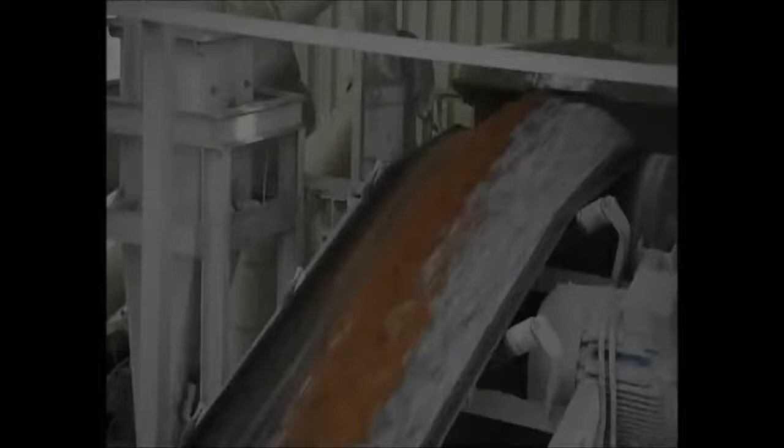Concrete. It's the most used building material on Earth. It was the building block of the Roman Empire. Today, it's the material for a new generation of gravity-defying skyscrapers. The raw ingredients that create this magic formula can be found in nearly every country on Earth.

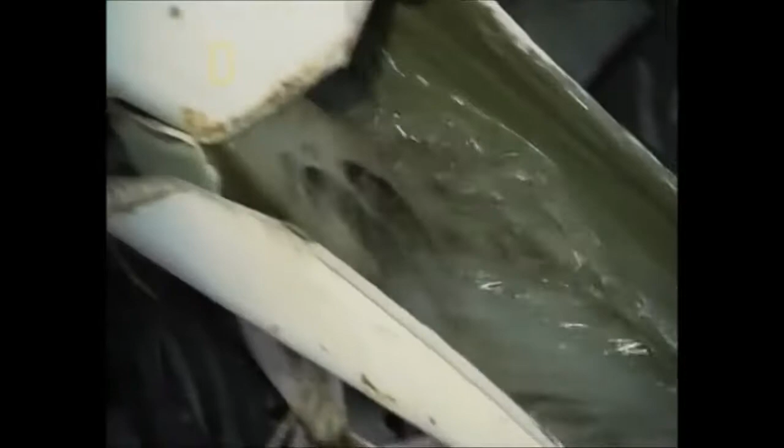Yet how these simple components are mixed together can make the difference between tragedy and triumph. From the mundane to the massive. From the ordinary to the extraordinary. Concrete helped pave the way for innovation and laid the foundation for the world's greatest civilizations. Now, go inside the science of concrete.

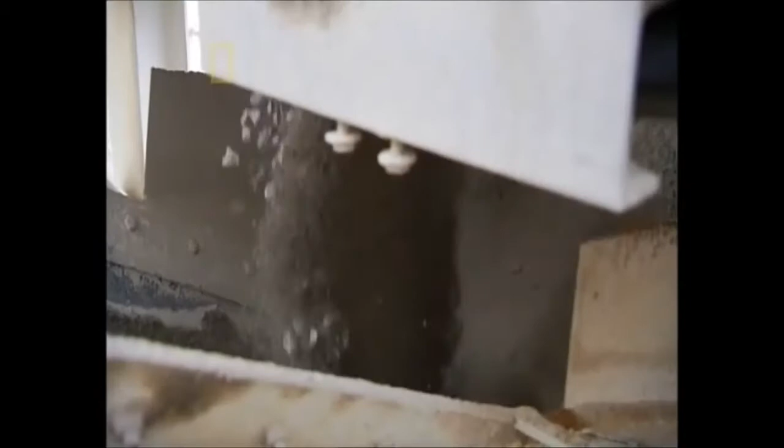It starts out like liquid. When it dries, it becomes stone hard. This amazing metamorphosis has earned concrete the nickname liquid rock. It has served as a cornerstone of engineering for centuries. And it's a highly prized tool of construction for a reason.

It's easy to take concrete for granted. People see it in sidewalks and roads all the time, every day. But in fact, it is the closest thing to a miraculous material in construction that we've ever had. Concrete is everywhere. It has an almost unlimited engineering potential. It can take on nearly any shape and forms the backbone of a variety of the world's construction.

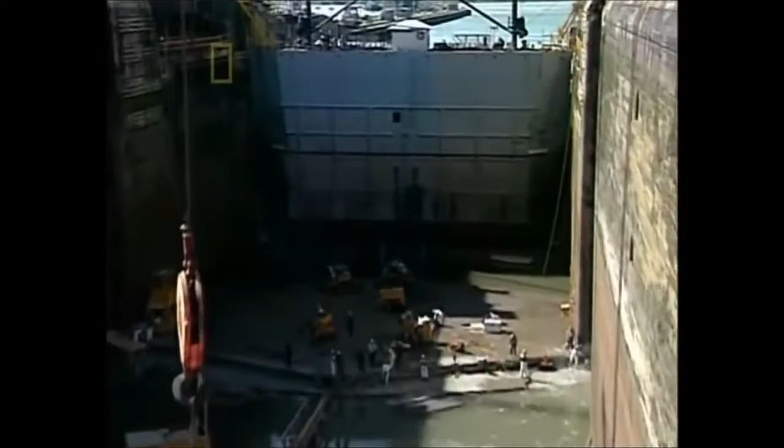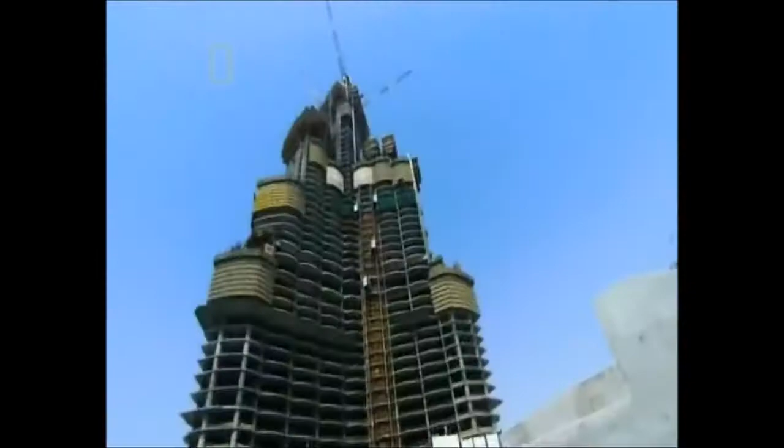Superhighways, massive bridges, man-made waterways, mega dams, the world's tallest skyscrapers. This miracle material begs the question, how does it do it all? I worked on a lot of jobs, and basically they all have a different formula for their concrete. Now, I can't imagine the world without concrete.

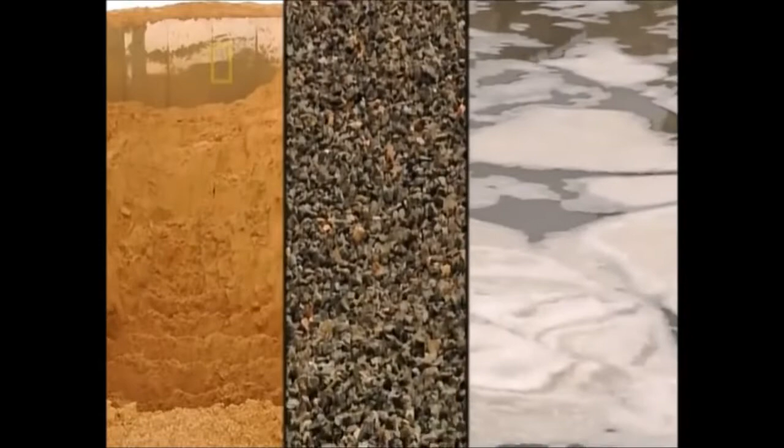The basic formula for concrete is simple. Sand, crushed rock, called aggregate, water, and the heart of the concrete mix, cement. Cement, it is the grey, powdery material that acts as a glue that sticks all of the concrete together. It covers and coats all of the gravel, the sand, and the rock as a way of gluing and binding the whole material together.

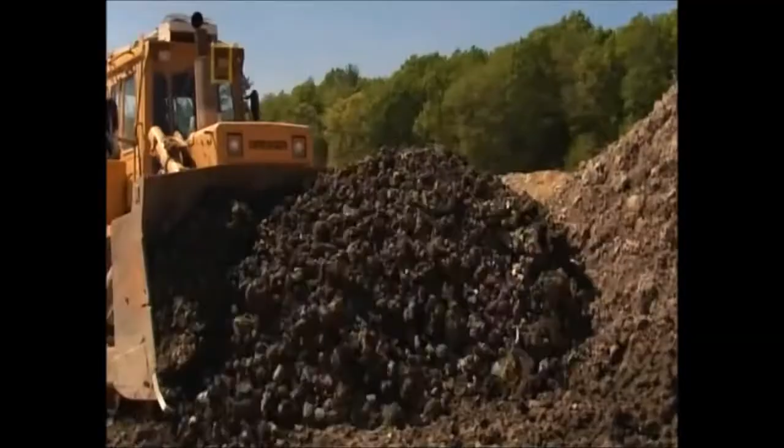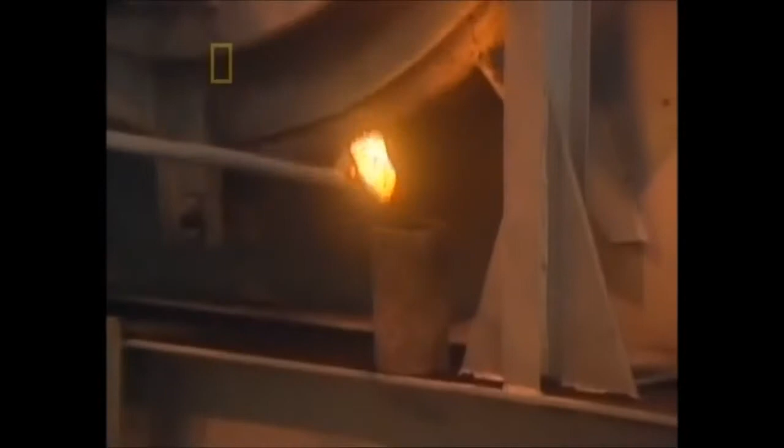To make cement, you need limestone, clay, and other elements like iron. These ingredients are crushed and combined into a powder that's poured into a kiln. The massive cylindrical spinning kilns heat the mixture to a temperature as high as 2,700 degrees Fahrenheit. The mixture becomes partially molten, forming a new marble-sized component called clinker. Once cooled, machines grind clinker into a superfine powder we know as cement.

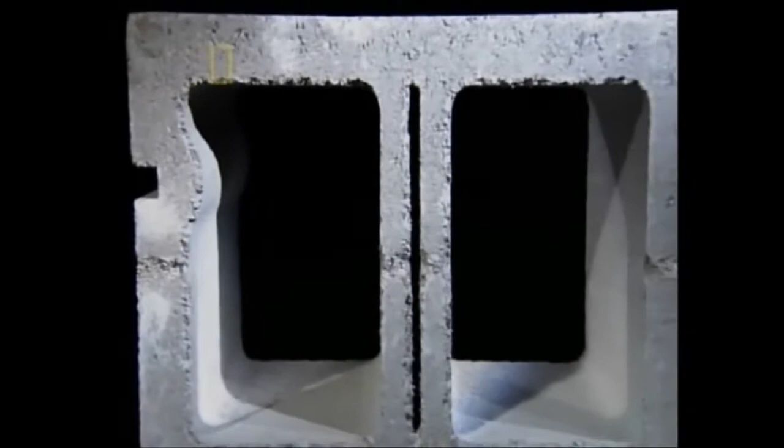Cement binds the ingredients together. When added to sand, water, and crushed rock, the cement reacts, linking the raw elements into one powerful whole. Water is the key. When cement reacts to the water, it undergoes a transformation called hydration.

During this reaction, a node forms on the surface of each cement particle. The node grows and expands, linking up with other nodes. It sticks to the crushed rock and sand in the mix. Cement binds these ingredients. As it solidifies, concrete becomes a building block of modern construction. This basic process hasn't changed in over a century.

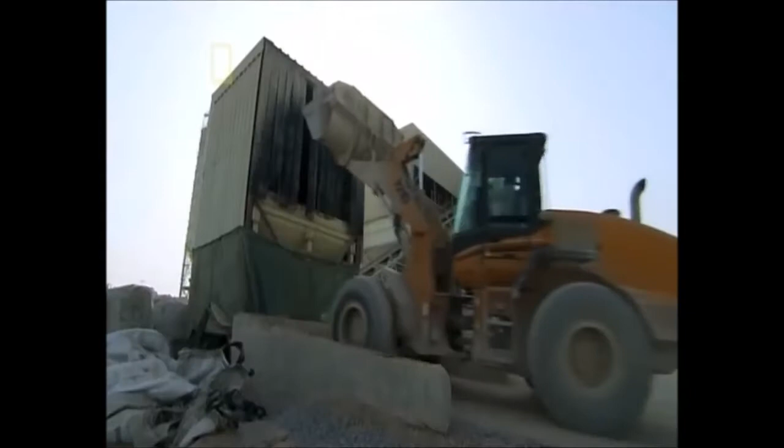But creating concrete is no simple matter. Making the right recipe requires precision and flawless preparation. It is a synergy of ingredients and timing. In a way, making concrete is like making a cake. There are lots of different recipes to make a cake. You get different flavors, different colors, different textures, but there are also lots of ways that you can make a cake wrong. It's not going to set properly, or it can come out in a way that's very different from your intentions.

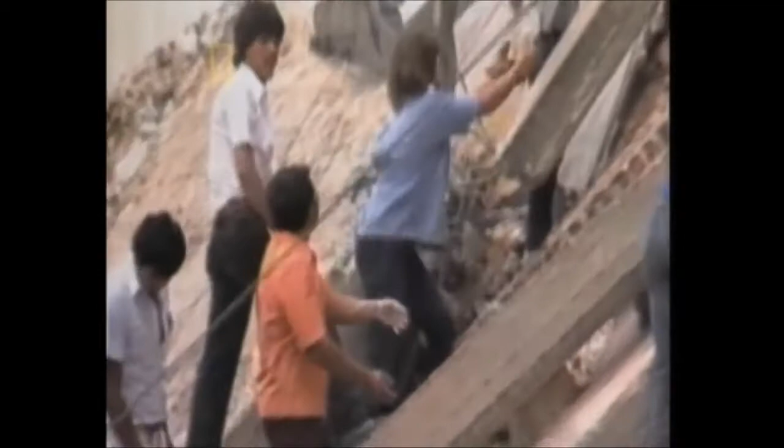Getting the recipe right is everything, and the consequences of a flawed mix can be deadly. The residents of Mexico City learned this the hard way. On September 19th, 1985, the Mexican capital is rocked by an 8.1 magnitude earthquake. It causes up to $5 billion in damages.

Investigation of the rubble reveals that many of the buildings had been made of a substandard concrete. Yes, we saw examples after the Mexican earthquake where when you use inferior concrete and you skimp on the rebar, and we saw both extensively in Mexico City, the concrete doesn't have its expected strength. The result is walls would fracture and shear and the building would collapse when the expectation would have been that the building should have easily survived to preserve health and safety.

The consequences of this quake are tragic. An estimated 10,000 die. Another 50,000 are injured. But with the right formula, structures made of concrete can endure thousands of years. Although other civilizations, including the Egyptians, experiment with concrete, the Romans transform it from a supporting material to a main substance. In Rome, liquid rock fuels the dreams of an empire.

The word concrete even originates in Rome. From the Latin concretus, it means grown together or compounded. Roman concrete contains the traditional ingredients of sand, water, and crushed rock. But volcanic ash from the hills of Pozzuoli, Italy, transforms the material.

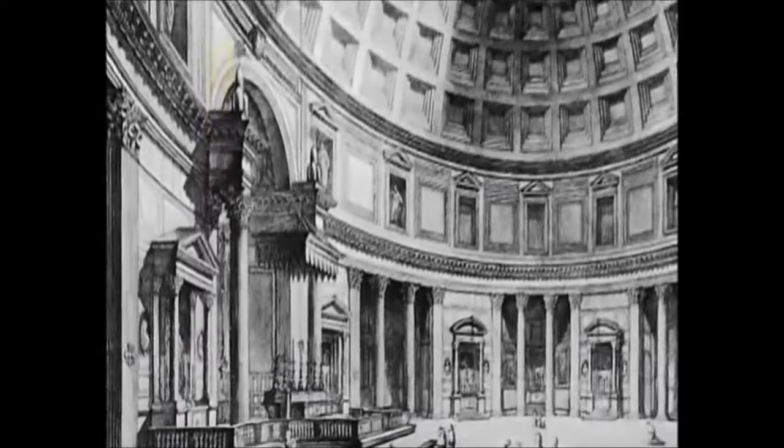This former temple to the Roman gods combines elements of engineering and design, and nowhere is that more apparent than in this concrete dome. Stretching 142 feet in diameter, it is the largest surviving dome from the ancient world. It was the largest dome in Western Europe until the 15th century. Unlike modern-day domes, which are generally reinforced, the only material holding the dome of the Pantheon together is Roman concrete.

Constructing an unreinforced concrete dome on the scale of the Pantheon is just an incredible engineering achievement. You couldn't do something like that today because everybody would have appraised the odds of your success as so small you would never get a chance to do it. The dome of the Pantheon is a stunning example of how Roman concrete could be built to last.

Each layer of the dome becomes less dense the closer it gets to the top. At its weakest point, the Romans designed an oculus which reduced weight and stress. These innovations continue to impress engineers almost 2,000 years later. For 1,500 years, that was the largest dome ever built by man. There aren't many engineered structures that stand that kind of test of time.

And then all the countless uses the Romans made for engineering aqueducts and other structures, roads, that made their civilization come together. So it's very difficult to imagine the Romans without concrete technology. The Pantheon's one-two punch of engineering know-how and architectural innovation influenced many structures to come: Thomas Jefferson's Rotunda at the University of Virginia, the Low Library at Columbia University, but none comes close to the Pantheon's lasting power.

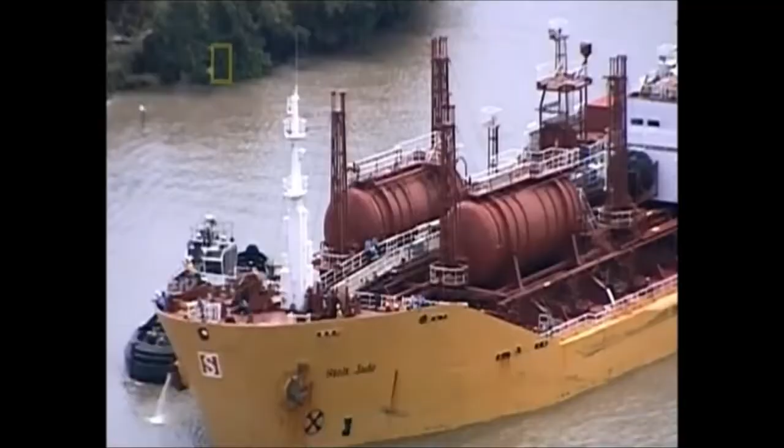It holds more than 52 million gallons of water. It cuts a path straight through the heart of a nation. It is safely navigated by more than 12,000 ships every year. The Panama Canal. It's not one of the world's great rivers. It's an entirely man-made waterway. And the material that controls this much water is liquid rock, concrete.

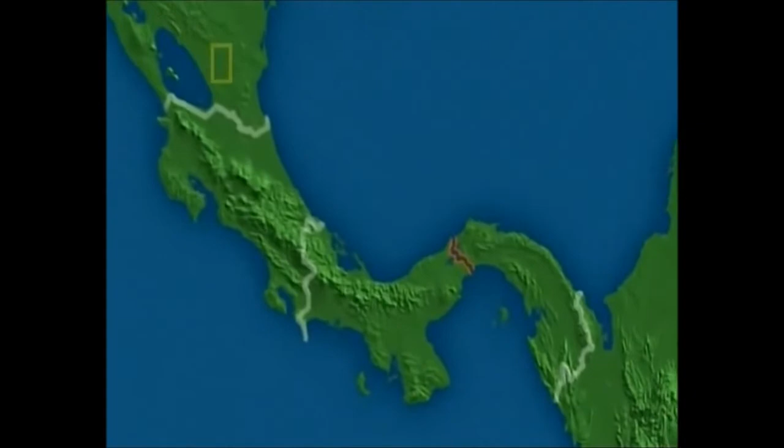By the late 19th century, the idea of a canal connecting across the isthmus somewhere in Central America had been floated for some time. Before its construction, a trip by boat from New York to San Francisco meant sailing 13,600 miles and crossing through the deadly waters of Cape Horn.

The importance of the Panama Canal cannot be underestimated because before it existed, all shipping had to take place between the Atlantic and the Pacific Ocean by going around Cape Horn, which is very treacherous, very severe storms for many months of the year, and many ships have been lost. The massive storms along the Horn had been sending skilled sailors and precious cargo to the depths of the ocean. The world needs a better route, a safer route.

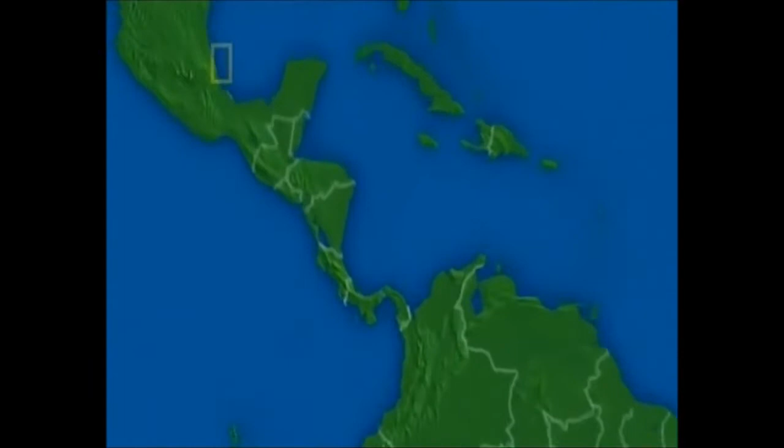February 1st, 1881. Ferdinand de Lesseps, the architect who crafted the Suez Canal in Egypt, decides to build another waterway through the country of Panama. Standing in his way are 51 miles of dense tropical jungle, torturous heat, and the fortress-like walls of Panama's central mountain range. How do you cut through the Continental Divide?

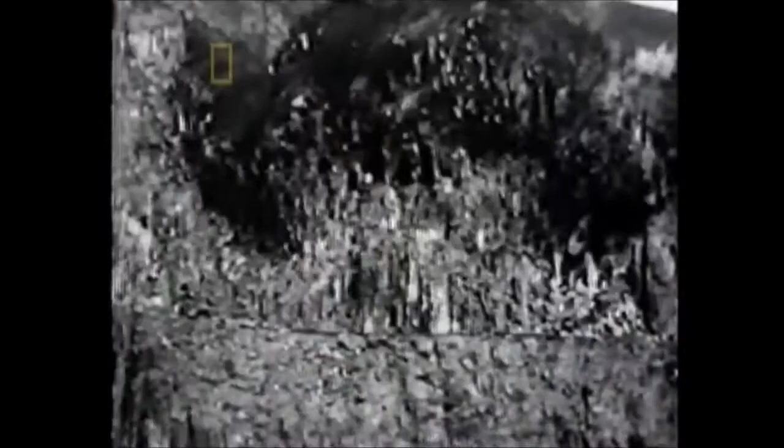Unfortunately, they hadn't talked to the rock. If the devil could have designed a material to plague poor de Lesseps, he would have made this material. As soon as you expose it to air, it oxidized. You'd excavate, and it would slide in. It ended up to be just an impossible project. De Lesseps' Panama Canal project quickly meets with disastrous consequences.

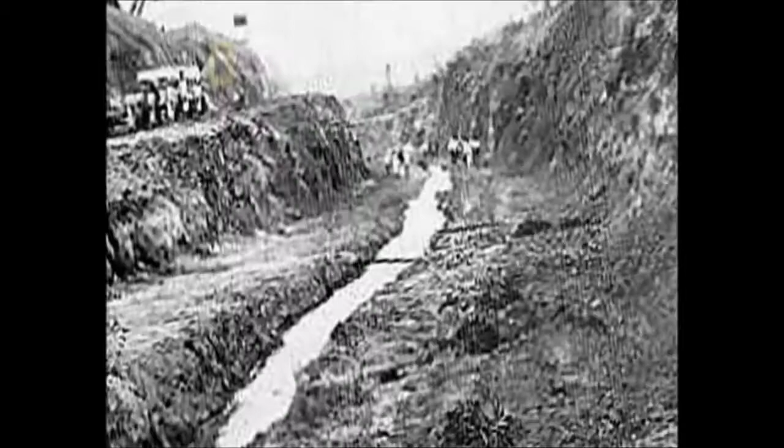22,000 workers die due to landslides, tropical disease, and dynamite. After 8 years, the French abandon the canal project. But the French failure is not simply due to disease and the mounting death toll. From an engineering standpoint, their plan is flawed.

With the American economy booming, an ambitious young nation takes over the canal project. President Teddy Roosevelt decides that U.S. workers are up to the task. American engineers learn from the French mistakes. The French tried to carve out a sea-level route through the difficult terrain, just like the Suez Canal. Instead, Americans use a series of chambers known as locks.

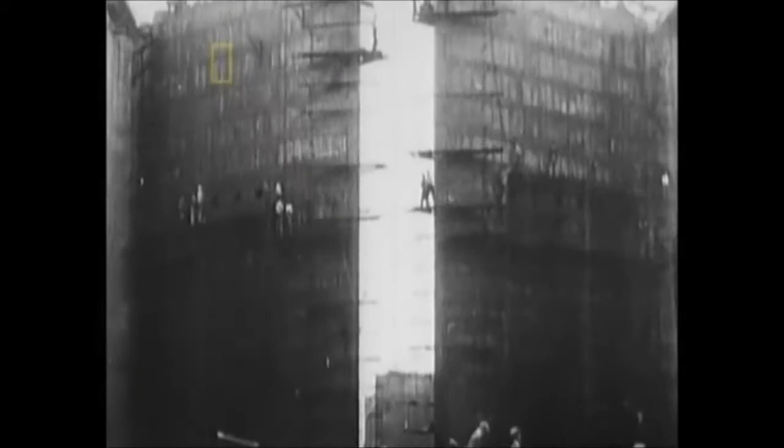Locks are simply big concrete tubs that you put between two bodies of water that have different elevation. You put a concrete tub between them, and the tub has got to be higher than the highest water. And then you put doors on each end of the tub, watertight doors. These chambers with doors fill with water, allowing ships to rise in steps. The ship crosses an artificial lake, then descends along a series of locks to the other side.

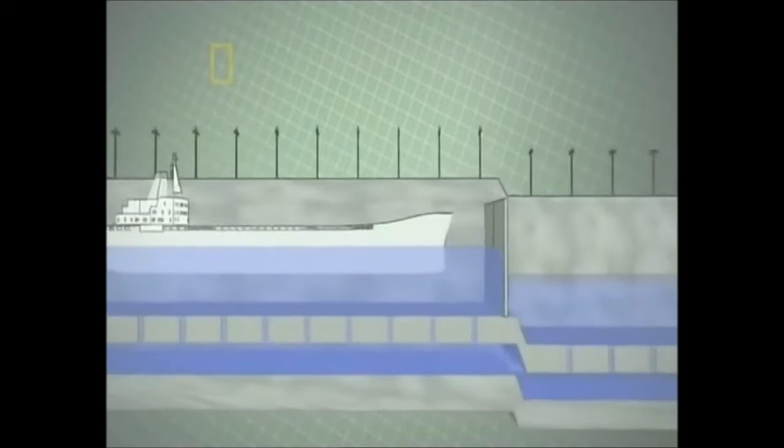It's just a concrete tub with doors on each end that raises things from low water to high water, or the reverse works just fine. You open the high water end, sail in the ship, close the doors, turn on the pipes down here, the ship settles down to the low level, open those doors, and off you go.

With enough concrete, they hope to dam the Chagres River. By redirecting the river, they will feed the artificial lake and fill the locks. And the best option for the locks is liquid rock. Without concrete, the Panama Canal would have been almost inconceivable. Certainly canals had been built before that. It's something that could be done, but at the scale that we were talking about, especially with the goals that they had in terms of timing, it would have been very, very difficult to do that without concrete.

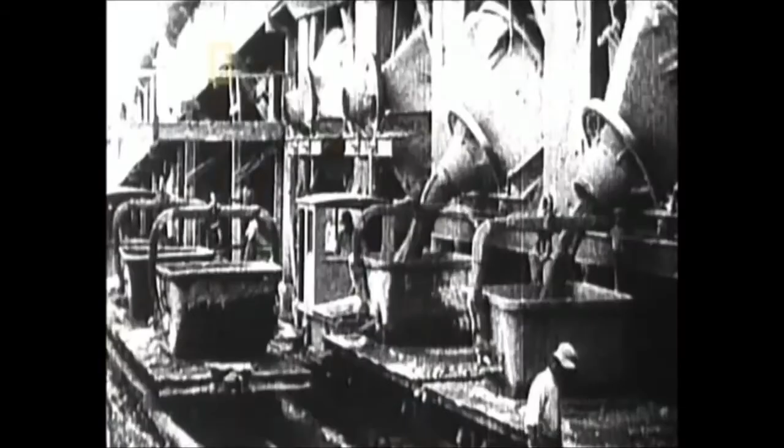The concrete locks will be a stairway bringing ships to the level of the lake. But they will need a high-strength concrete that can hold 26.7 million gallons of water for each lock. That's the equivalent of over 40 Olympic-sized swimming pools. Construction begins in 1904. About 4.5 million cubic yards of concrete were used in the construction of the Panama Canal. And because so much concrete was needed, they had to set 8 on-site batch plants in order to produce that much concrete.

Other materials, like steel or aluminum, can rust or corrode in water. The advantage of concrete is that water can make it stronger. Concrete needs water to complete its chemical reaction. If there's a little extra water around while it's going through the reaction, it just makes sure that all the concrete goes to completion in terms of its hydration. That's the chemical bonding caused by the water between the cement and the aggregate and the sand.

In order to prevent leaks, the concrete mix for the locks has to be very dense, not allowing any water to seep through. The concrete that you need to build a canal is not the kind of concrete that you need if you want to design a skyscraper. The recipe for the locks will try to be leak-proof. To solve this problem, builders choose smaller rocks for the aggregate in the mix. Tests show that adding finer aggregate creates a less porous concrete. The goal is a leak-proof lock that only expels water when the doors open.

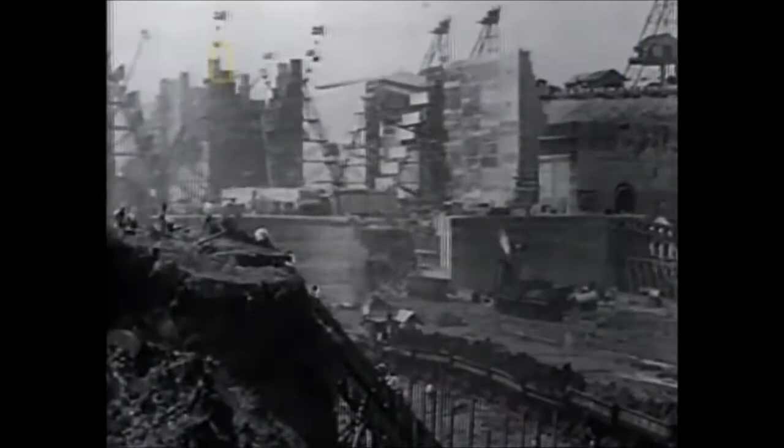With the mix just right, engineers begin building the locks that will control the waterway between two oceans. At the Gatun locks on the Atlantic side, each lock chamber is big enough to hold 3 Statues of Liberty, laid end to end, with room to spare. At these locks alone, workers pour more than 1.53 million cubic meters of concrete. These locks link to the artificial lake made by damming the Chagres River, Gatun Lake.

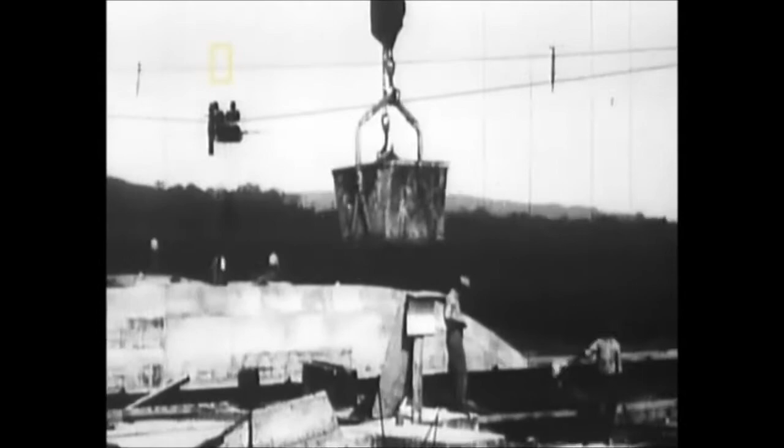9 years of construction. In May 1913, the last bucket of concrete is poured at the Gatun locks. Engineers prepare for the canal's first trial run. The tugboat Gatun travels through the locks on September 26th of that year. The locks work flawlessly and open for business 1 year later. Few engineering endeavors have changed the geography of the planet like the Panama Canal. After nearly a century in action, the concrete of the Panama Canal has stood the test of time. No other material has withstood wear and tear in the same way.

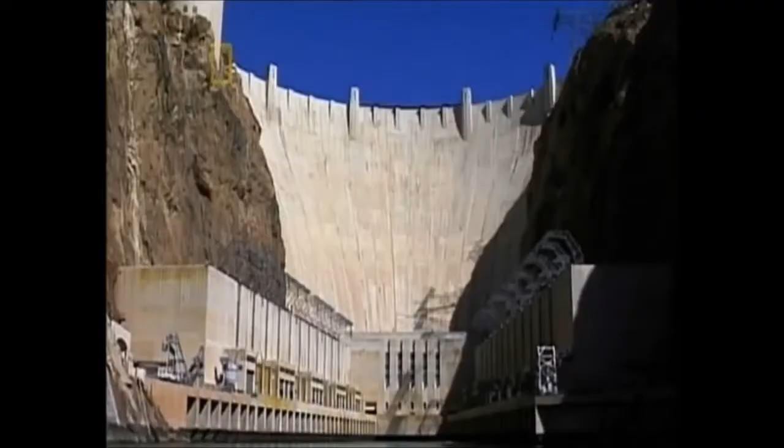Concrete linked 2 oceans, but an even bigger challenge awaits. How will concrete tame one of America's wildest rivers? Now go back inside the science of concrete. It has been called an American pyramid. The mighty Hoover Dam is a testament to the power of concrete.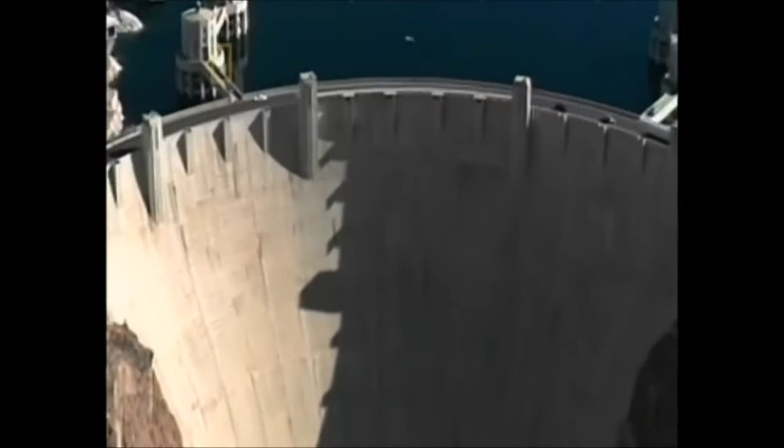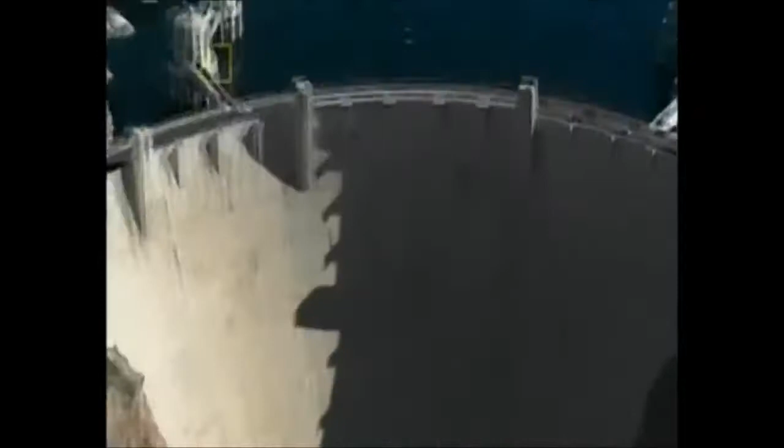Weighing 6,600,000 tons, this concrete colossus holds back 45,000 pounds of water per square foot. The force of this water generates hydroelectric power for over 1 million people. From the neon lights of Las Vegas to the freeways of Los Angeles, this hydroelectric dam generates 2,080 megawatts of electricity. The Hoover Dam's construction redefined what the world could do with concrete, but it also rerouted one of America's greatest rivers, flooding ancient canyons, reshaping the area's natural habitat.

In 1905, the Colorado River breaks free of a man-made canal. It floods Lower California across 150 square miles. Epic floods wipe out thousands of farmers. Millions of dollars are lost. The Colorado is unpredictable. The Southwest also has another problem: power. The boom towns of Los Angeles and Phoenix are growing at a rapid rate and desperately need energy. Raging floods and lack of power. Two different problems. But engineers believe there is one answer to both: dam the Colorado River.

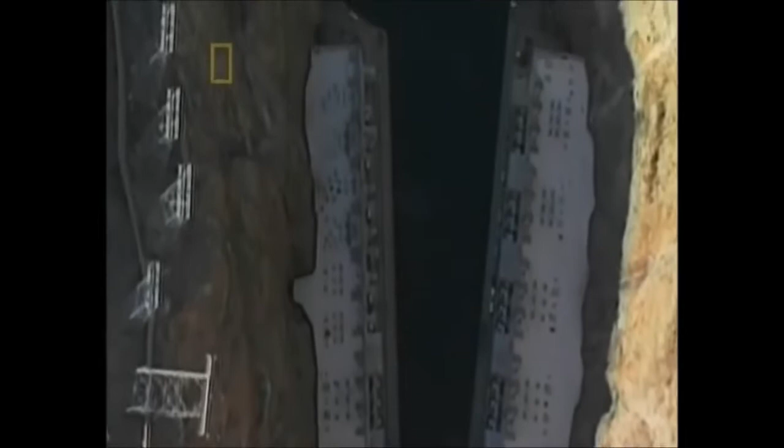A hydroelectric plant would harness the natural power of the Colorado and, using simple mechanics, convert that energy into much needed electricity. You're generally looking in the construction of a dam for a huge, solid structure. It's really about holding back enormous quantities of water. The dam needs a material that is strong enough to hold back the raging Colorado. And since the location would be remote, able to be made on site, one material can meet all of those requirements. It's hard to imagine the Hoover Dam being built out of any material other than concrete. Using steel on this scale would be too costly. But to make the Hoover Dam, engineers would need more concrete than had ever been used before in one project.

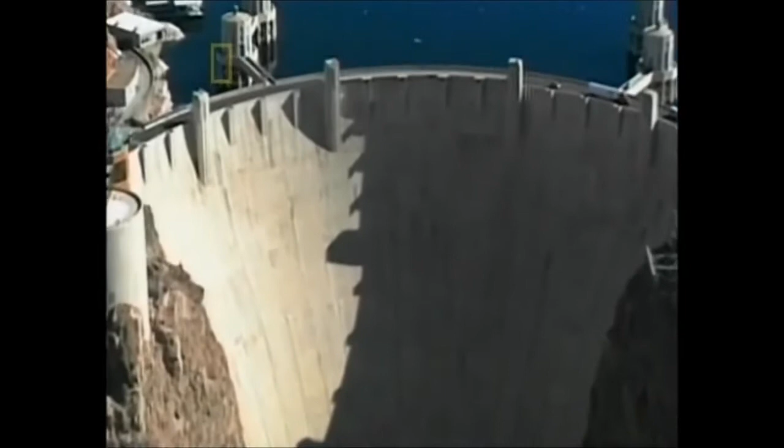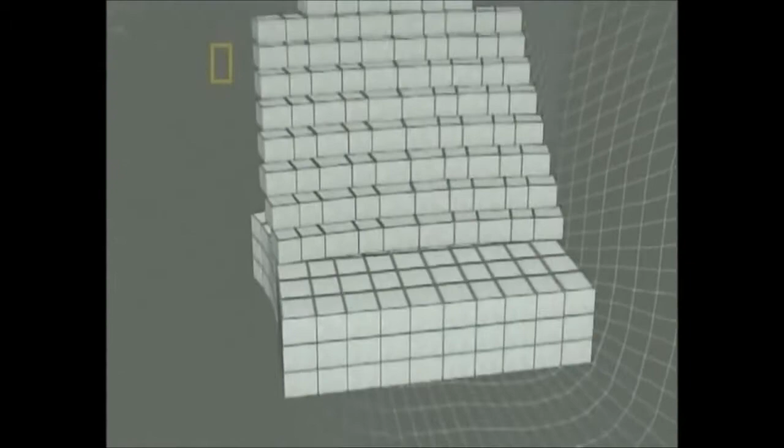The dam will be 726 feet high and 1,244 feet wide. With a structure this big, it will be impossible to do one massive pour of concrete. The amount of material that went into this dam was so enormous that there's no way to pour the concrete in one segment. So what they did is they divided the whole dam into lifts and then into individual blocks. The Hoover Dam needs to be built as a series of individual blocks that will interconnect. Trapezoidal in shape, the blocks rise in 5-foot lifts. This crucial engineering element allows the project to progress in stages. Something on that scale being built in concrete had not been built before.

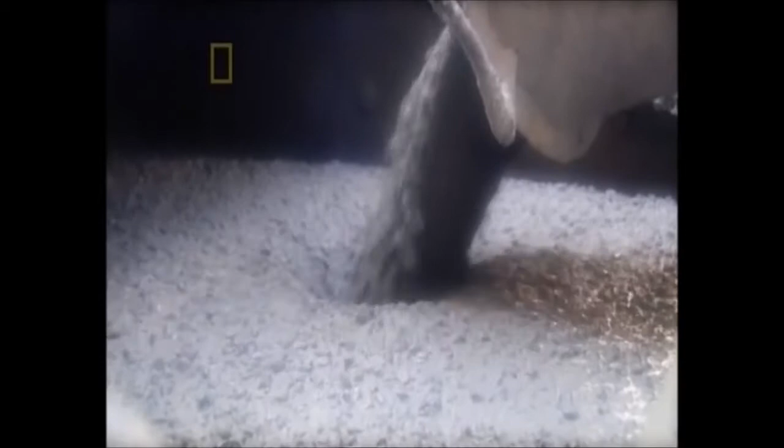Hundreds of pounds per square inch, thousands of pounds per square foot on the base of the dam, trying to push the dam downriver. And now you've got to get the Hoover Dam to withstand this incredible water pressure trying to push it down the river. Chief Engineer Frank Crowe knows the completed dam will have to hold back 45,000 pounds per square foot of water. For this, they need a special high-strength formula. Crowe's solution? A minor but crucial modification to the standard concrete formula. A very dry mix, one that uses less water. More water makes it more workable, but shrinks more, and shrinkage causes cracks. The less water, down to 7%, the better and stronger the concrete.

The dam's remote location also means crews will have to build 2 concrete mixing plants on site. Shipping a very dry concrete formula from a facility far away would render it useless by the time it's transported to the dam. Because speed is of the essence when working with a very dry concrete mix, the crews working the pouring cranes have to push themselves to the limit to pour quickly and accurately.

When concrete cures, it gives off a powerful heat, a result of the cement and water reacting to make the rock-hard substance. The process by which concrete cures, we call an exothermic reaction. By that I mean it gives off heat. And indeed, if someone pours a sidewalk or driveway around you, right after the slab dries enough to touch, put your hand on it. It'll feel warm. That exothermic, it gives off heat you can feel, sensible heat. As the amount of concrete going through this chemical reaction gets bigger and bigger, the amount of heat that's given off gets bigger and bigger.

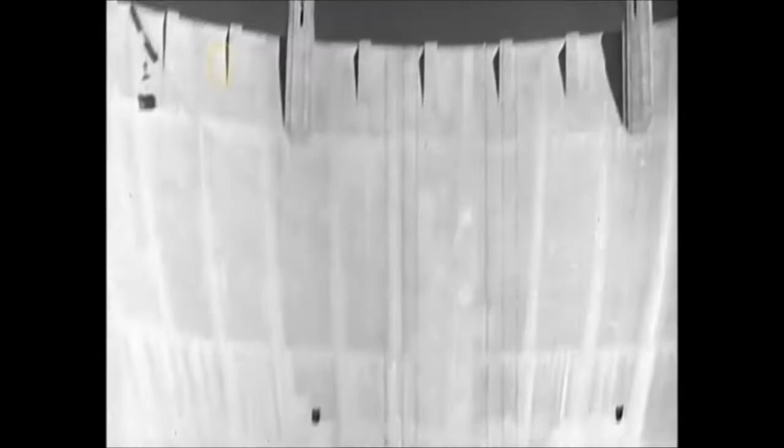Engineers calculate that if the dam were built in one continuous pour, the concrete would get so hot that it would take 125 years for it to cool to normal temperatures. The extreme heat would also cause the concrete to crack and crumble away. Concrete dries from the outside in. If the concrete is not evenly cooled, it can crack, putting the stability of the whole structure at risk. Instead, Frank Crowe and his team of engineers have an innovative solution.

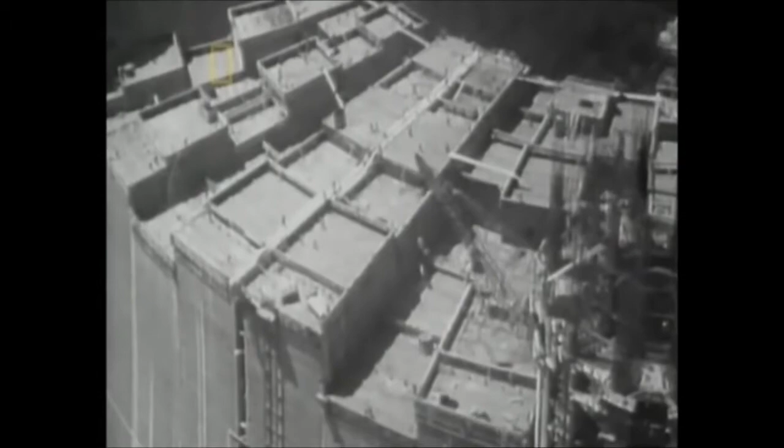Each block is outfitted with coils of thin-walled steel pipe. When the concrete is first poured, water from the Colorado River circulates through these pipes. The idea is to initiate a cooling process, but one done in stages. Cooling the concrete too quickly will cause it to crack.

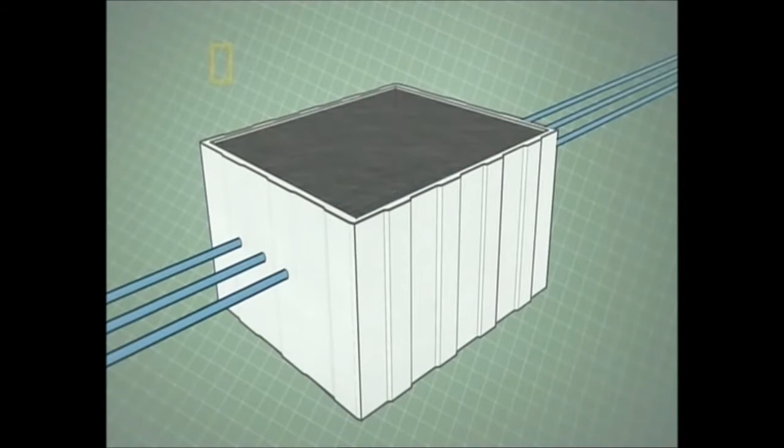After the concrete has received its initial cooling, chilled water from a refrigeration plant is circulated through the coils to finish the cooling process. As each block is cooled, the pipes are cut off, and they are filled with grout by pneumatic grout guns, pumping 300 pounds per square inch of filler.

Once the individual blocks have cooled and set, there is one final challenge. In order to prevent the hairline fissures between the blocks from weakening the dam, the individual blocks are formed with vertical interlocking grooves. When the concrete has cooled, grout is forced into these joints, bonding the entire structure into a monolithic concrete giant. This method takes advantage of one of concrete's fundamental properties.

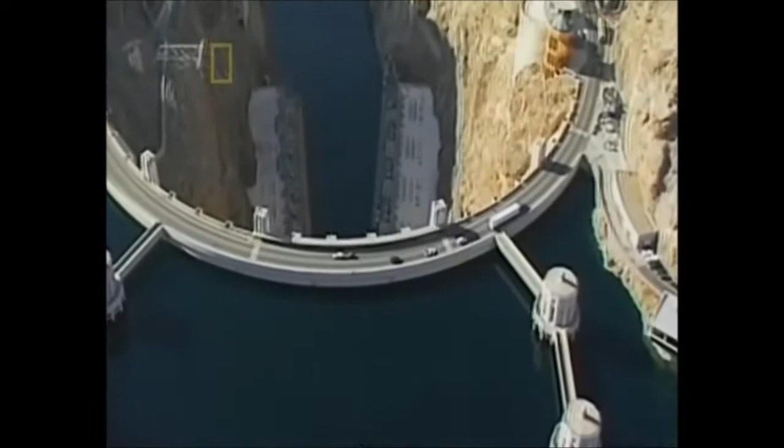Concrete as a material is very strong in compression. To build a structure, to make sure that the concrete is all in compression, you bend the beam like this, so now the water pushes on a column. Well, what's the water trying to do? It's trying to push that through. Well, it's the Pantheon Dome again. Only this time it's the water trying to do it. It's trying to push the dome through the river gorge. What that does is put the whole structure in compression.

Well, concrete loves compression. The more it is forced together while setting, the stronger concrete becomes. As a result of this property, the Hoover Dam is arguably stronger today than it was on opening day, 70 years ago. The Hoover Dam is a testament to engineering know-how and a skillful use of concrete.

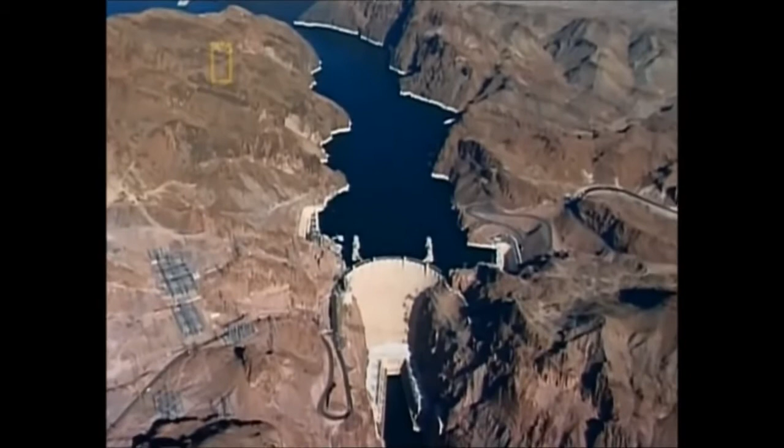The dam contains enough concrete to pave a strip 16 feet wide and 8 inches thick from San Francisco to New York. More than 5 million barrels of cement were used in the Hoover Dam, and a total of 21,000 men worked on its construction. And it represented an enormous engineering achievement to build successfully. It took the lives of over 100 men to build that dam.

Today, the concrete megadam is nothing new. But Hoover set the stage and showed the world that concrete could do the job and help generate much-needed power. It changed the course of one of America's wildest rivers. Now the question is, can concrete conquer the skies?

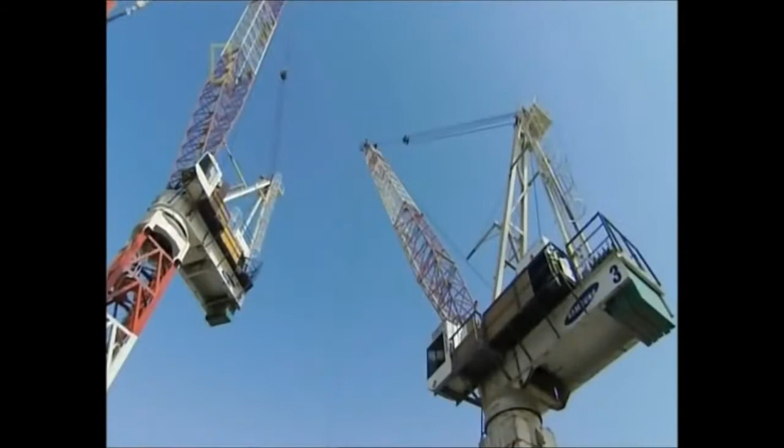In the scorching Persian Gulf, a growing structure cuts the horizon. Its expected height is a closely guarded secret, but experts around the world agree the Burj Dubai may be the world's tallest skyscraper. It'll be the tallest building, for sure, the overall title holder for some time to come. A construction project this massive needs 11 cranes and the world's fastest high-capacity construction elevators. The building rises at the breakneck pace of one floor every 4 days.

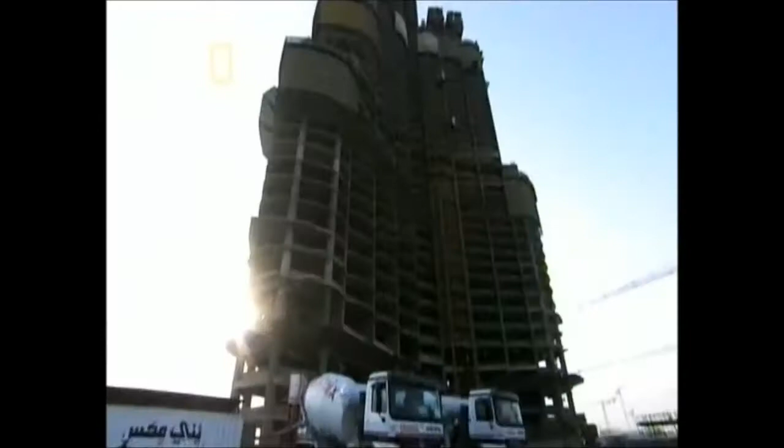And from the walls to the floors, to the columns to the stairs, much of this desert skyscraper is concrete. More than 160,000 cubic meters of it. At more than 2,000 feet, the Burj Dubai will be the crown jewel of the United Arab Emirates and is a shining example of a new generation of skyscrapers that seek to dominate the skies. It is a far cry from the humble beginnings of the concrete skyscraper, more than a century ago.

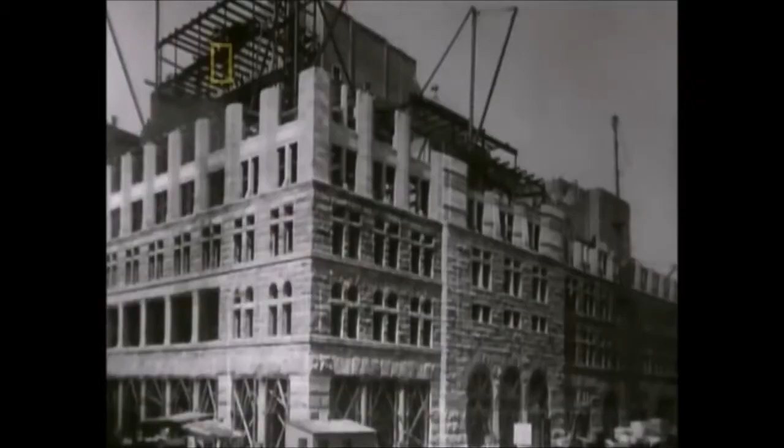At the beginning of the 20th century, the building material of choice was not concrete, but steel. You can build a hell of a skyscraper with steel. In fact, the Empire State Building is so overbuilt, you could probably add another 30 stories to it under today's building codes, and it would still comply fine. So steel was a great material. You can build a great building from steel, but it's an expensive way to go.

And steel is not only costly, but represents a challenge for a new generation of skyscrapers that grow increasingly higher. And if you're going to go tall, the building's got to be stiff. It is so much easier to make those thick, stiff walls from reinforced concrete than steel that it's a no-brainer. The Petronas towers in Malaysia are concrete, and this new one in Dubai is going to be concrete. If you're going to go that high, it's going to be concrete.

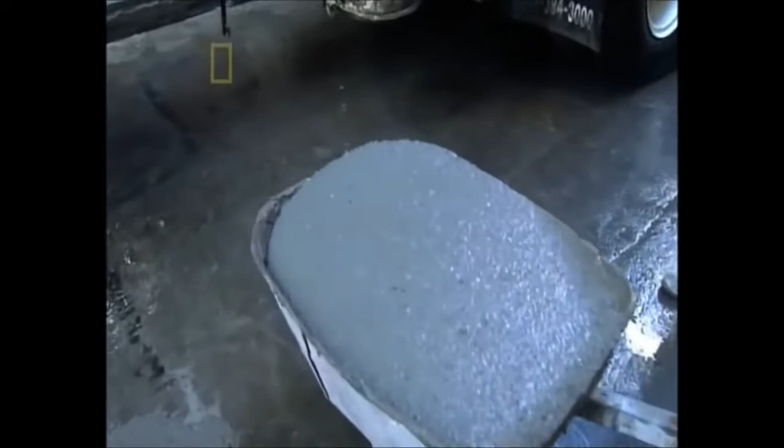The stiffness of concrete, combined with its availability and relatively low cost, have made it the building material of choice for these new skyscrapers. As our experience and comfort level with reinforced concrete came along, and as the buildings started getting taller, reinforced concrete really became the material of choice.

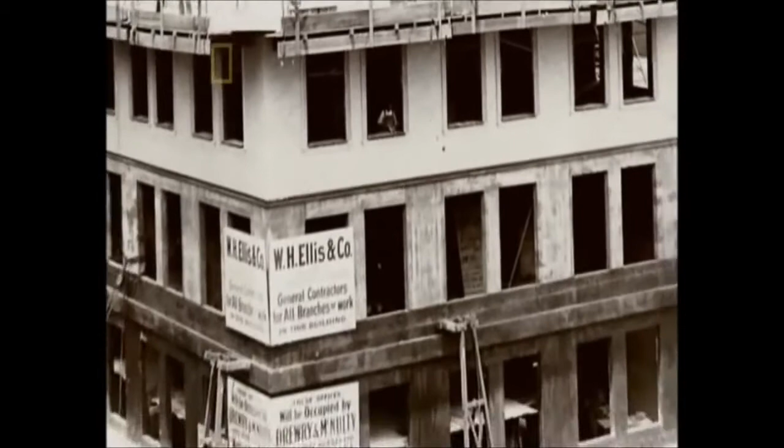Before 1902, the tallest steel reinforced concrete building is a paltry 6 stories tall. The Ingalls building in Cincinnati changes that. Engineer Henry Hooper dreams of a monolithic building of concrete, a skyscraper 16 stories tall. But many engineers believe that a concrete tower 16 stories high will collapse under strong winds or even its own weight. When Hooper finishes his building, there are many skeptics.

There's one anecdote that says that a reporter actually stayed up all night waiting for the Ingalls building to collapse because he was so certain that it was going to. Needless to say, the reporter was disappointed in the end. It is a towering success for its time. But at 210 feet, it is just one in a dizzying array of modern-day skyscrapers. More than a century later, the towering dream of Dubai aims to be over 10 times the size of the Ingalls building.

Every morning, workers assemble in the garage of the building. Erecting this much concrete in the punishing heat of the Gulf requires serious manpower. But before workers can pour a drop, the perfect formula needs to be mixed at the batch plant. The first problem this leviathan from the desert faces is its own height.

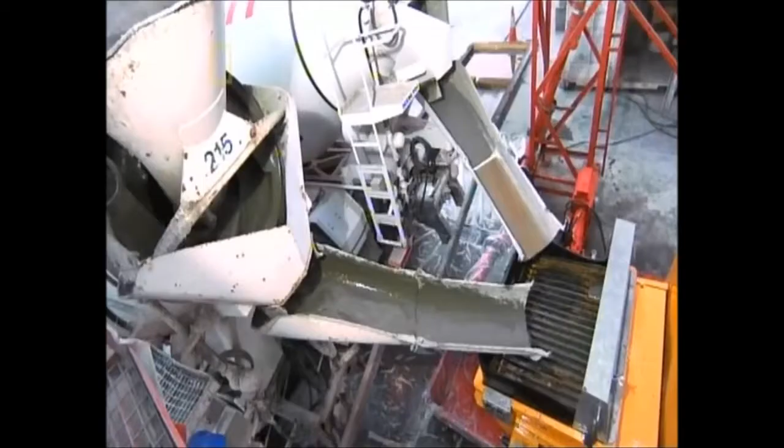I'll give you an example. It's like if you're giving blood to a patient, so how important is the blood to be tested before you give it to the patient? It's a big risk. So same is with the concrete. When it has been tested, I get confident that whatever I am giving to the structure is tested and it complies with the requirements. It won't be just a mere guess.

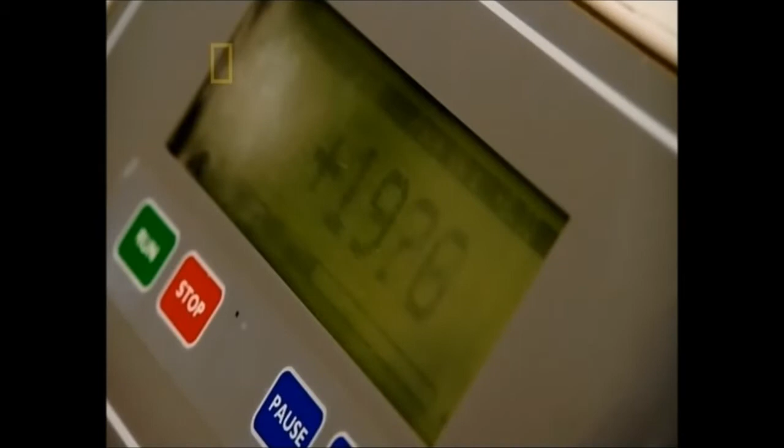To test the strength of the concrete, small cubes are hardened in cool water. Next, the concrete is deposited into a crusher for a stress test. This cube holds up to nearly 14,000 pounds per square inch, making it a high-strength concrete. The concrete test has been successful. But as strong as this formula is, it still has to contend with desert heat.

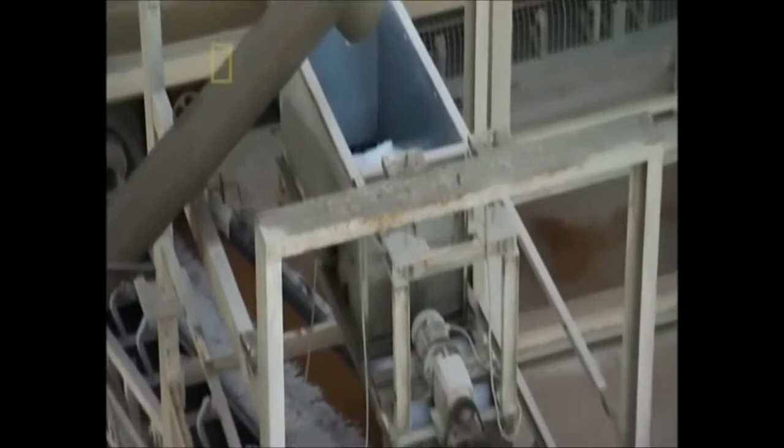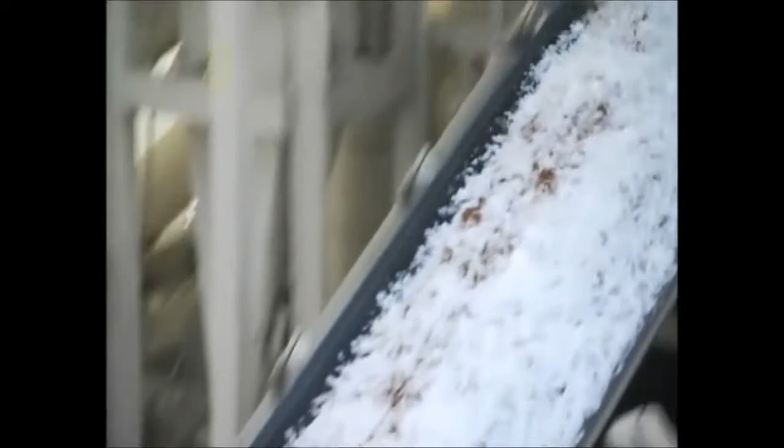Temperatures top 120 degrees. How do you keep concrete cool in the desert? Builders use a deceptively simple technique. Shaved ice. While it's being mixed at the batch plant, slices of ice are mixed into the concrete so that it remains cool inside of the mix trucks. When it arrives at the building site, the melted ice has kept the concrete from overheating.

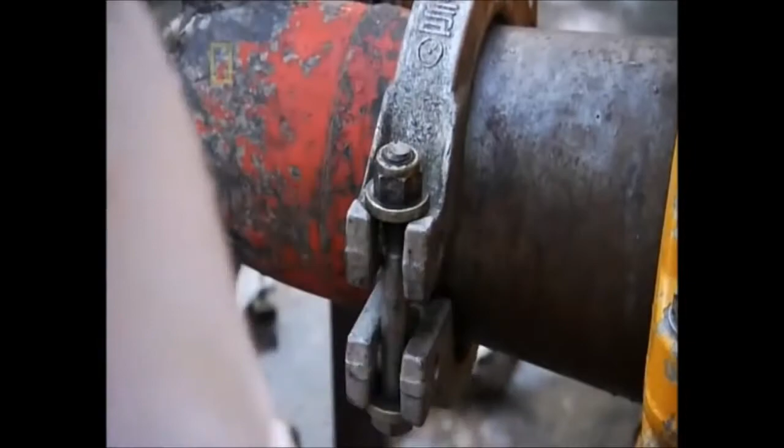But now, the concrete has to travel hundreds of feet into the air. The key technical problem for building a building of this size and of this height is going to be to vertically pump concrete of the order of 2,000 feet high. It takes huge amounts of pressure. Mixer trucks deliver the mix to the pumps. The building requires 3 pumping stations where the liquid concrete is poured. The high-pressure pumps force the concrete through a complex system of pipes.

Now, the technology to do so is awesome. If you think in terms of water, you have 1,000 feet of hydraulic water pressure. That's a tremendous kind of pressure. Now, concrete weighs 2.5 times as much as water. So you need a piping system that's so much stronger, and also pumps that are so much more efficient to pump concrete up that high.

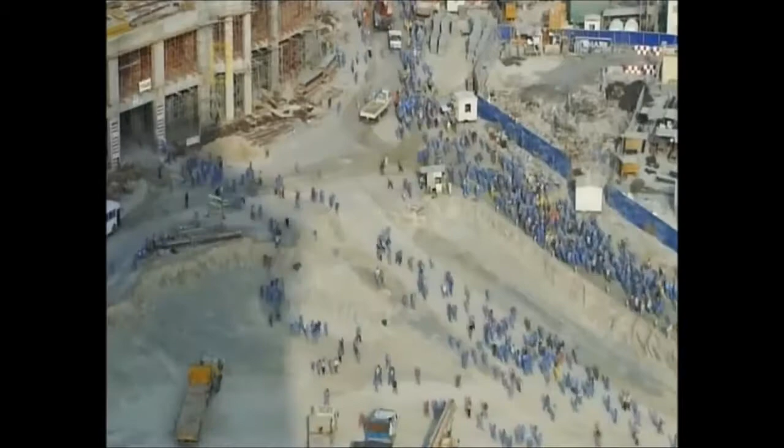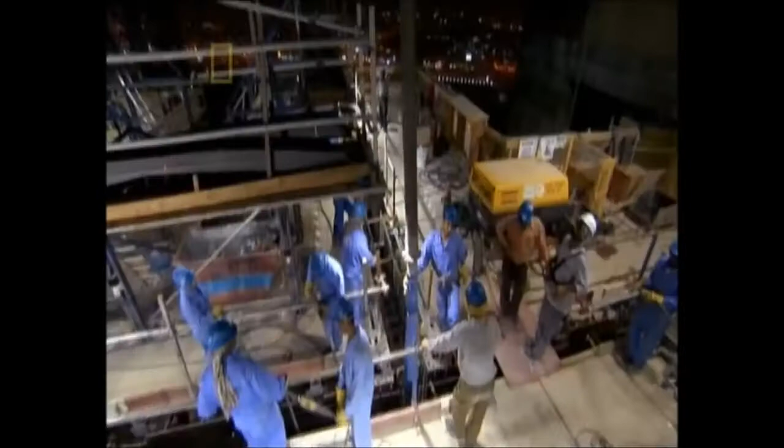As the sun sets, the second shift workers return to feed this growing skyscraper. The concrete pour takes place at night so that the concrete can harden evenly. At the moment, even though it's 10 o'clock at night, it's about 100 degrees Fahrenheit, and the humidity is about 90%. The advantage of pouring concrete in these conditions, because the humidity is so high, we don't have a problem with it drying out the top surface of the concrete, but we've got effectively another roughly 130 stories to go.

As the pour continues into the night, the Burj Dubai has reached a milestone. 25% of the building is done. When completed, this megastructure will stand over 2,000 feet tall, making it twice as high as the Empire State. It will be covered in a reflective glaze to protect it from the extreme heat and high winds of the Gulf. But the building's guts are solidly concrete. When it's finished in 2008, the Burj Dubai will be the tallest building in the world.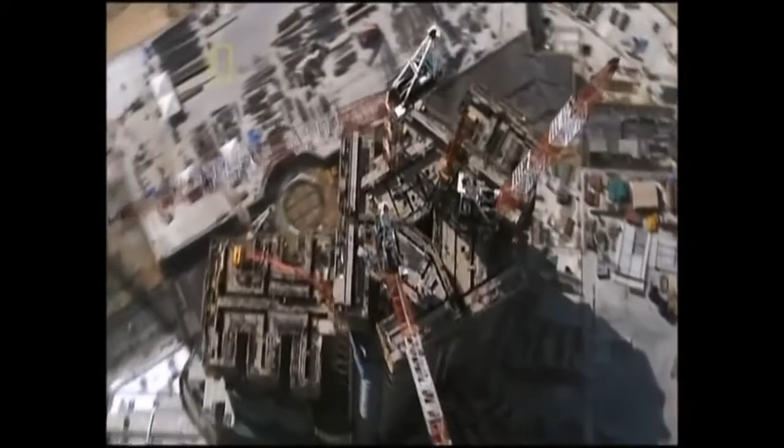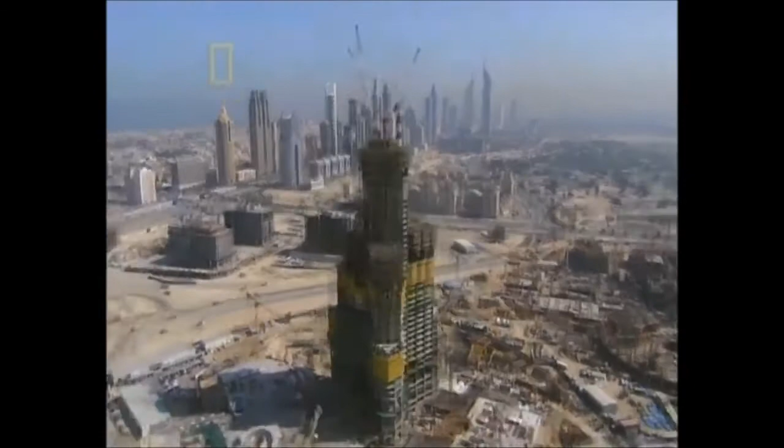Like the Ingalls, the Burj Dubai has set the standard for its day, showing once again that concrete can be used in a variety of ways for the world's tallest buildings. Now, reinforced concrete is establishing itself as a building material of choice for skyscrapers. Concrete has conquered the skies. Concrete's next quest: how to tackle the building challenges of the future.

Concrete has been a key ingredient in the construction of our civilization. It has been a fundamental part of our architectural past and is now paving the road for our future. Scientists are developing new formulas for concrete and are looking for ways to make it stronger, more environmentally friendly, and capable of doing things we never thought possible.

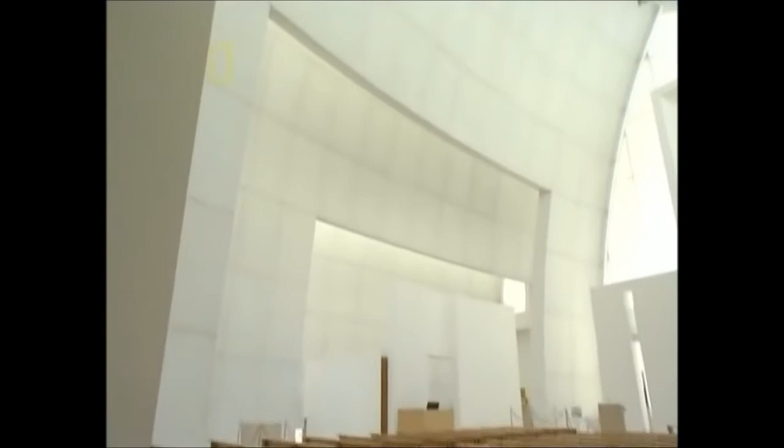Back where it all started, at the heart of the Roman Empire, concrete has taken a new and exciting turn. Just a few miles from the Pantheon, the Jubilee Church, designed by architect Richard Meier, uses a new form of concrete. The church was commissioned by the Archdiocese of Rome to commemorate 2,000 years of Christianity. For that, the building would need a material that was both ancient and modern, a material that would speak to the church's past and make a bold statement for the future. They would also need a material that would last the test of time.

Concrete fits the bill. This church is remarkable for several reasons. It has these three sail-like forms, loosely representing the Holy Trinity, but made in effect of giant concrete blocks. The shells of the church, which stretch out and up in the same way as the Sydney Opera House, are made of 346 white, reinforced, precast concrete blocks.

Concrete, for all of its advantages, does tend to pick up discolorations from the atmosphere and so on. Meier, though, wanting to keep his building white, managed to work with local firms in order to achieve this concrete mix that included these photocatalytic particles that will absorb and neutralize the acids in the air. And in effect, what you'll have is a pollution-eating building. Italcementi came up with a revolutionary new formula for the concrete that will keep it as pristine in 50 years as it was on opening day.

All concrete structures tend to stain and degrade from pollution. Over time, this has given concrete a bad reputation. But the unique formula for the Jubilee Church contains a secret weapon: photocatalytic particles. Now, in effect, what these do, when activated by the light of the sun, they mix with the acids in the air and neutralize those acids, neutralize the discoloration that would come typically from atmospheric pollutants. So, in a way, you kind of have a self-cleaning building.

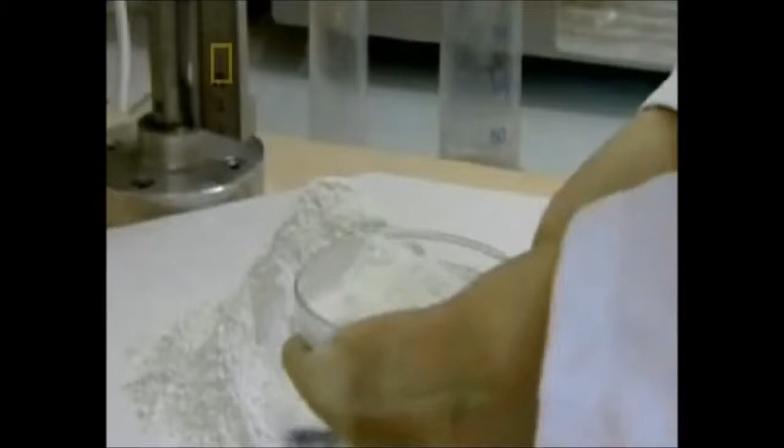New developments in concrete technology now allow for what used to be unthinkable: helping the environment by using an unusual aggregate: glass. The innovation here has been in making sure that the glass doesn't get corroded by the lime in the cement mixture. One of the biggest issues with concrete is that the Portland cement tends to be quite corrosive, and this has been a big problem with things like recycled glass. It tends to corrode, the glass falls out.

This composition of cement was actually developed by Columbia University. It is a much less corrosive, more benign cement, allowing you to put the glass chips in. So you can actually now have concrete with glass chips that actually has a good surface effect.

We are generating millions of tons of garbage, solid waste, and in New York City, approximately 6% of all solid waste is glass. That's bottles like this, yeah? And these bottles generally find their way into landfills. And that costs taxpayers hundreds of millions of dollars just to get rid of these bottles.

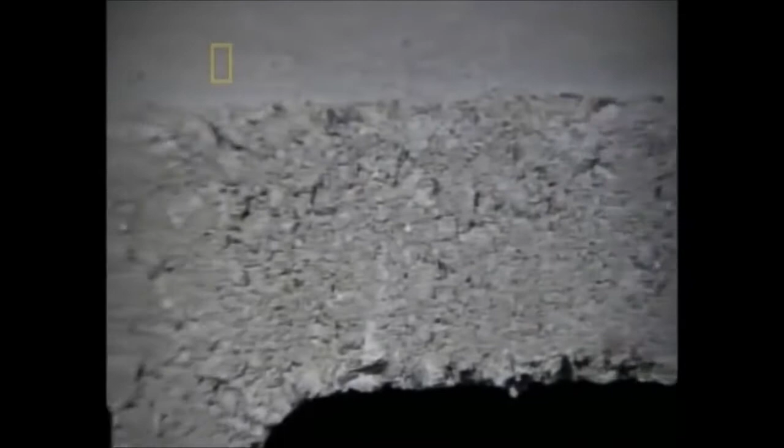Concrete's versatility allows it to bind with other materials, in this case, glass. The first step is to separate the bottles by color. And then you crush them in a crusher. Now, crushed glass is not something like this. This is what we call broken glass, and that is something you want to handle very carefully. It has sharp edges, and that was also one of the problems we were facing, because skeptics asked, well, if you use glass in concrete, won't people cut their hands by handling the blocks or whatever?

Answer is no, because when you crush the bottles in a high-impact crusher, it comes out in pieces like that, and it's just like sand. It does not have sharp edges. Eventually, the broken glass is crushed into a fine powder. So this is just like powder, like baby powder, the same kind of particle sizes. So if you put this finely ground glass powder into concrete, you can replace part of the cement by this glass.

These are actually 100% recycled glass pieces added into the concrete. Initially, scientists thought that recycled glass would make for a bad aggregate. But Professor Meyer and his team have found a way. Okay, so once you make concrete out of these glass particles and color coordinate that very well, then you can get something like this, and this is now already being commercially produced.

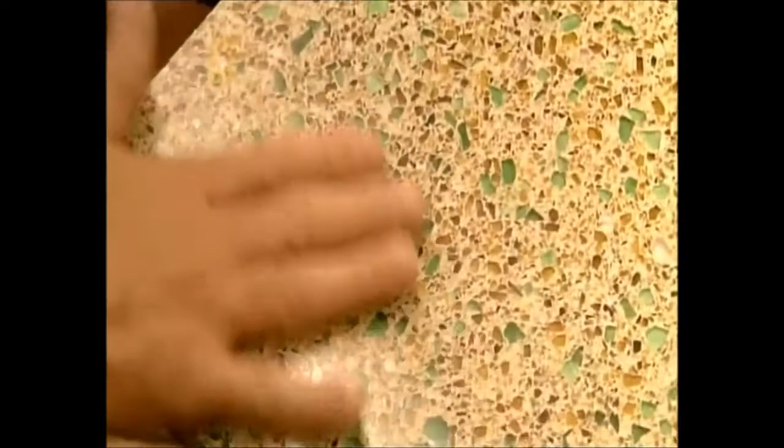That's the way how regular concrete would look. And this is here our glass concrete, polished to a high precision, high grade of polishing. And that is known as terrazzo concrete. Using recycled glass as an aggregate is just one of the many ways that concrete continues to reinvent itself. It also may pave the future for a more environmentally friendly concrete.

There are also other developments reshaping concrete for the future. For the last 100 years, architects and builders have sought a way to allow light into concrete buildings, homes, and offices in a more efficient manner. One of concrete's biggest drawbacks is that it creates dark buildings that do not effectively conduct light. Experts are working to change this.

Okay, this is a piece of light transmitting concrete. It seems like an odd concept, but what they've done here is to take standard concrete and add glass fibers. Okay, so what you're seeing here is the blue LED passing through the glass fibers that are embedded in the concrete. Imagine concrete allowing light to pass right through it, or for someone to cast a shadow through a concrete block.

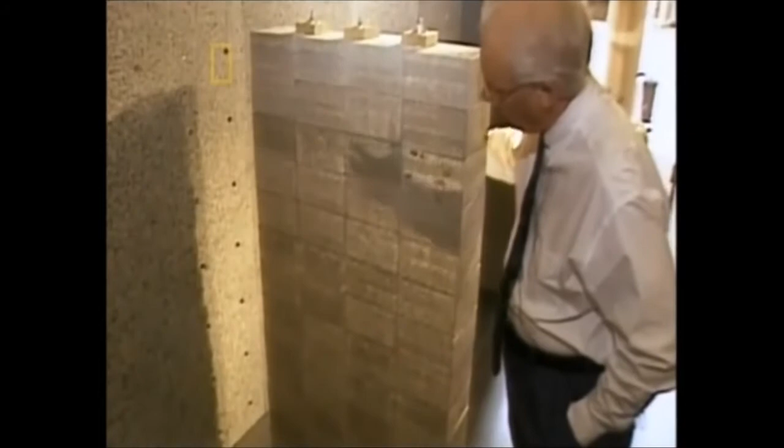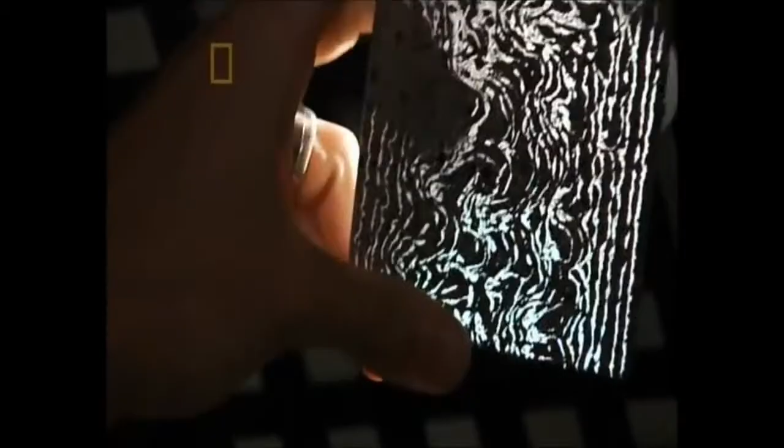This same thing can happen with normal daylight as well. So the idea is that you can build a structure with this concrete and allow daylight to actually come through the structural element of the concrete. Light transmitting concrete, or LiTraCon, is a unique form of concrete that uses glass fibers to conduct light. It allows for massive structures to permit light to shine through. This technology has the potential to redefine what concrete looks like.

Once considered cold and impersonal, these new forms of concrete are transforming the material. What started off as the most basic of building materials is now on the cutting edge of building and design. The future for concrete is virtually limitless. If concrete is anything, it is a material that continuously reinvents itself. Concrete continues to adapt to the emerging challenges of our world and is laying the foundation for our future.

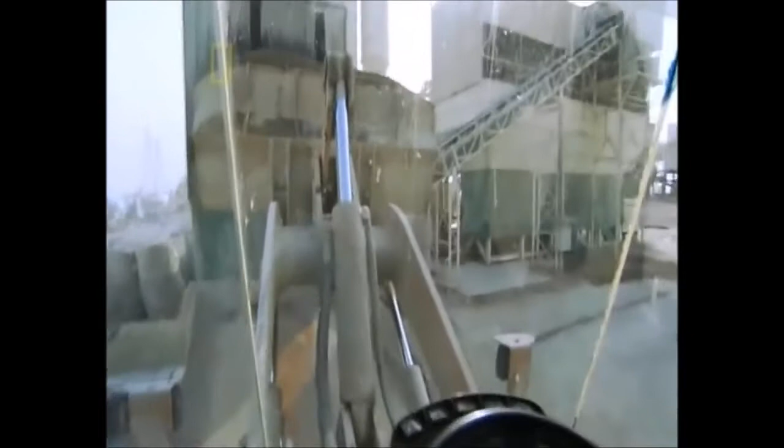But creating concrete is no simple matter. Making the right recipe requires precision and flawless preparation. It is a synergy of ingredients and timing. In a way, making concrete is like making a cake.

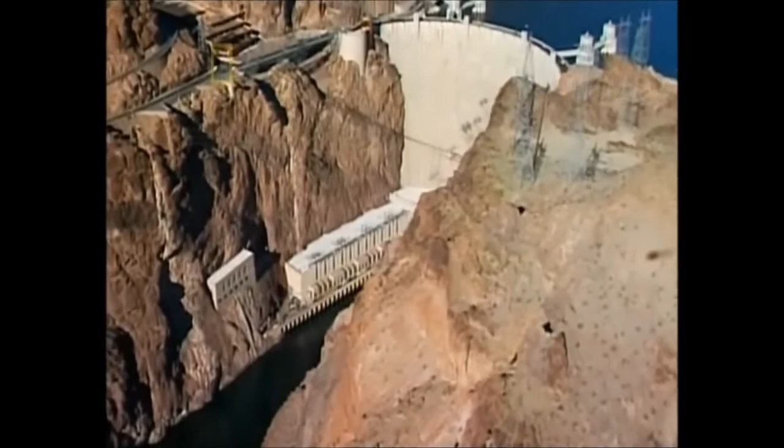Superhighways, massive bridges, man-made waterways, mega dams, the world's tallest skyscrapers. This miracle material begs the question, how does it do it all? I worked on a lot of jobs, and basically they all have a different formula for their concrete. Now I can't imagine the world without concrete.

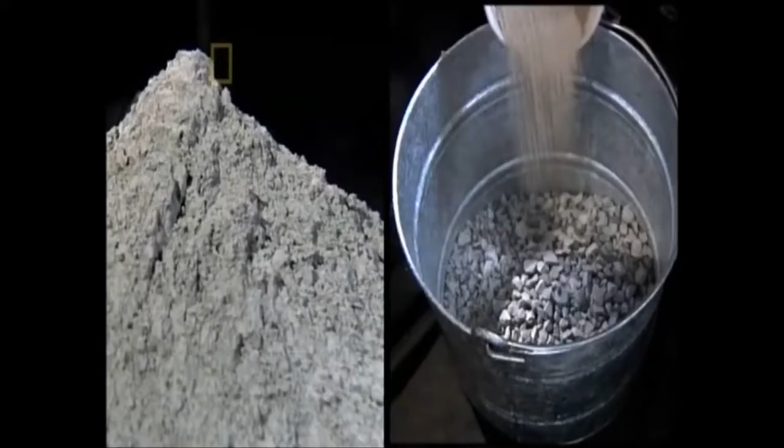The basic formula for concrete is simple. Sand, crushed rock, called aggregate, water, and the heart of the concrete mix, cement. Cement, it is the grey, powdery material that acts as a glue that sticks all of the concrete together. It covers and coats all of the gravel, the sand, and the rock as a way of gluing and binding the whole material together.

To make cement, you need limestone, clay, and other elements like iron. These ingredients are crushed and combined into a powder that's poured into a kiln. The massive cylindrical spinning kilns heat the mixture to a temperature as high as 2,700 degrees Fahrenheit. The mixture becomes part of concrete.

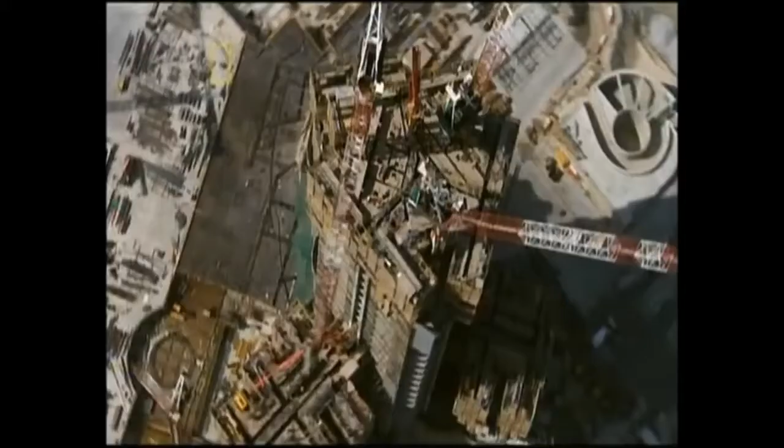It's the most used building material on Earth. It was the building block of the Roman Empire. Today, it's the material for a new generation of gravity-defying skyscrapers. The raw ingredients that create this magic formula can be found in nearly every country on Earth. Yet how these simple components are mixed together can make the difference between tragedy and triumph.

From the mundane to the massive. From the ordinary to the extraordinary. Concrete helped pave the way for innovation and laid the foundation for the world's greatest civilizations. Now, go inside the science of concrete. It starts out like liquid. When it dries, it becomes stone hard. This amazing metamorphosis has earned concrete the nickname liquid rock.

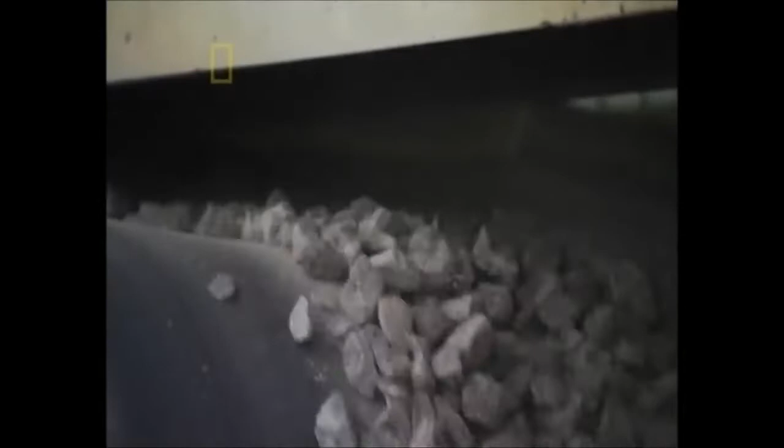It has served as a cornerstone of engineering for centuries. And it's a highly prized tool of construction for a reason. It's easy to take concrete for granted. People see it in sidewalks and roads all the time, every day. But in fact, it is the closest thing to a miraculous material in construction that we've ever had. Concrete is everywhere.

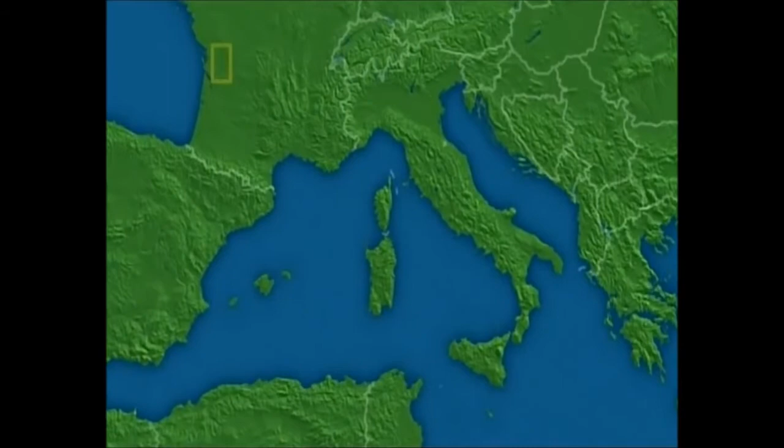The word concrete even originates in Rome. From the Latin concretus, it means grown together or compounded. Roman concrete contains the traditional ingredients of sand, water, and crushed rock. But volcanic ash from the hills of Pozzuoli, Italy, transforms the material. The Romans were very astute architects and engineers, and they recognized that by mixing volcanic ash from Pozzuoli in Italy, they were able to get a concrete that became very hard.

This volcanic ash proves to be an adhesive binding agent. It gives ancient Rome a powerfully strong concrete. This innovation allows the Romans to craft an empire from the ground up. Concrete becomes the backbone of a dizzying array of structures, aqueducts, bathhouses, and markets. But today, one structure alone stands as a unique testament to the power of ancient Roman concrete: the Pantheon.

The Pantheon is one of the great architectural works of ancient Rome, with a wonderful colonnade that introduces the building, and then a huge drum covered by this amazing 142-foot dome, and that dome is made of concrete. Constructed around 125 AD, the Pantheon has stood prominently in the center of Rome for over 1,800 years.

Getting the recipe right is everything, and the consequences of a flawed mix can be deadly. The residents of Mexico City learned this the hard way. On September 19th, 1985, the Mexican capital is rocked by an 8.1 magnitude earthquake. It causes up to $5 billion in damages. Investigation of the rubble reveals that many of the buildings had been made of a substandard concrete.